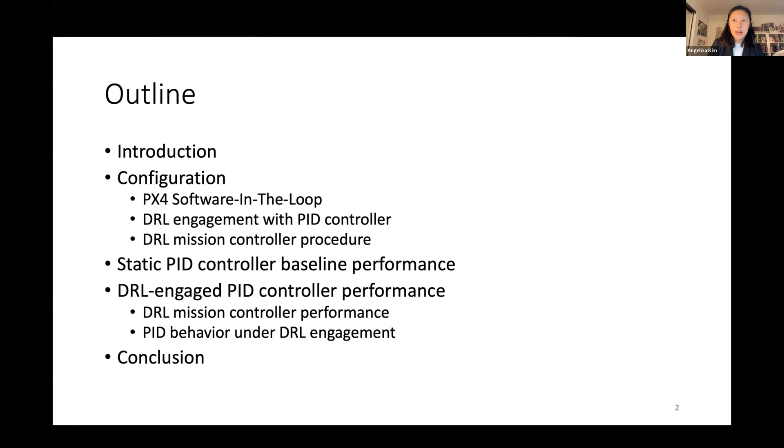Okay, so this is going to be the outline of my presentation today. First, I'll be going through an introduction, then discussing more on the configuration and setup of the project, specifically regarding the PX4 software in the loop and the DRL engagement with PID controller, along with the DRL mission controller procedure. Then I'll be discussing my results with the static PID controller baseline performance and the DRL engaged PID controller performance, specifically regarding the DRL mission controller performance and the PID behavior under DRL engagement, and finally the conclusion and analysis of my results.

So first, a brief introduction. Deep reinforcement learning network has been applied to the control of unmanned aerial vehicles. Previous research has utilized DRL to replace traditional proportional, integral, and derivative controller loops. This study deploys DRL at mission controller to adjust position and velocity PID controllers in flight controller of rotational wing unmanned aerial vehicles to improve mission control performance. It is equivalent to an online tuning of front end and low sampling rate PID controllers in real time to achieve a desired performance.

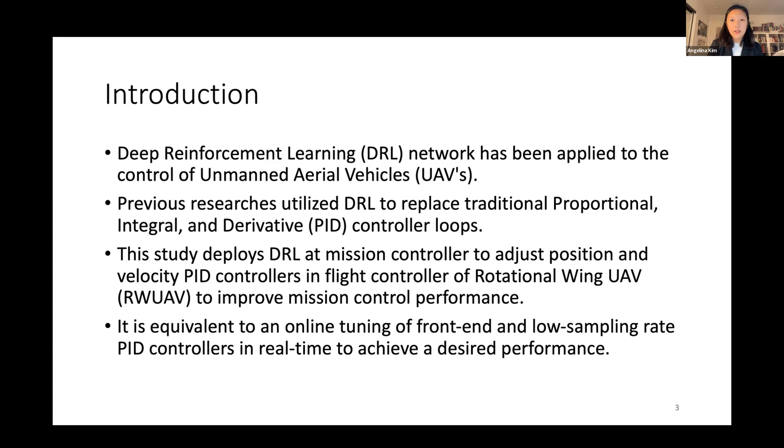So here we can see some commercial jet fleet accident statistics from the Boeing company. The takeoff, initial climb, final approach, and landing phases account for 67% of accidents with 6% exposure time. Though these are limited to fixed wing and manned airplane statistics, the goal of this study is to resolve these issues with a rotational wing unmanned aerial vehicle through dynamic control and performance improvement at these 4 phases.

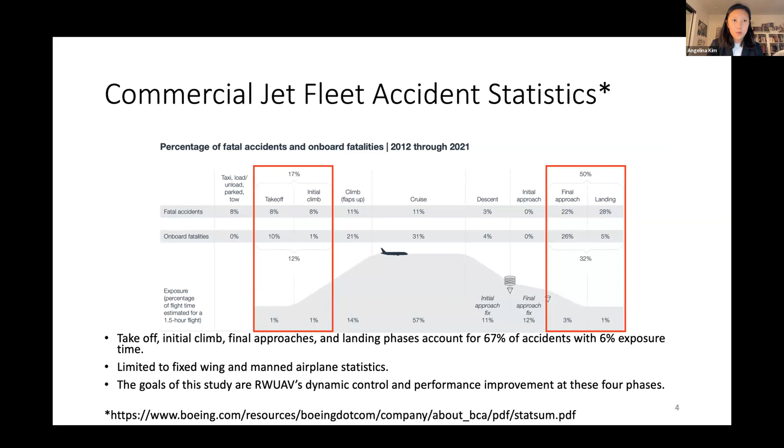So the PX4 software in the loop. The PX4 Autopilot is a RWAV platform and is under the software in the loop. Gazebo Physics Simulator provides environments to PX4 RWAV, and specifically the wind plugin supports the random wind, which is what I used in my study. The mission controller is a custom Python code with or without DRL network, depending on the specific case. And QGroundControl is an optional visualization and monitor tool. All elements are connected through the micro aerial vehicle link, or MAVLink.

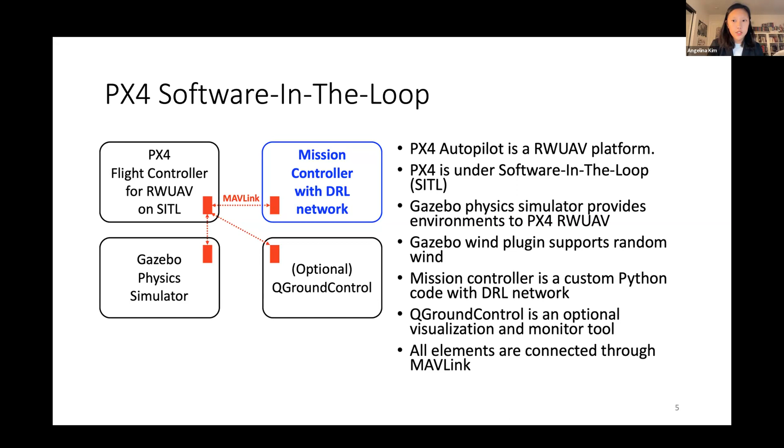The DRL engagement with PID controller. So the TF-Agents reinforcement learning agent implements the DRL network at mission controller. The DRL network accepts telemetry observation data as input, generates action space with position and velocity controller coefficient ranges, and then updates the position and velocity PID controllers through MAVLink at 10 Hz rate. Position and velocity controllers' rate is 50 Hz, and they are tuned in real time by the DRL network.

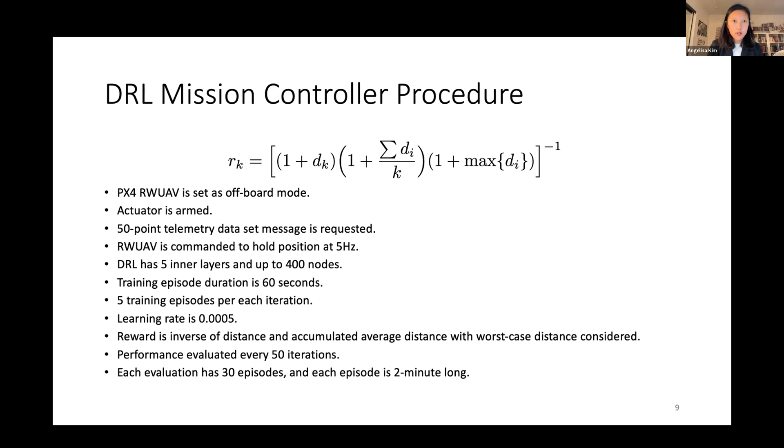So the static PID controller baseline performance. Static PID controller RWAV is put to varying windy environments. Horizontal wind with random velocity and direction is applied to RWAV as force in Gazebo. At each mean velocity, wind is set at 0.5 meters per second standard deviation and limited at greater than 2 meters per second than the mean maximum velocity.

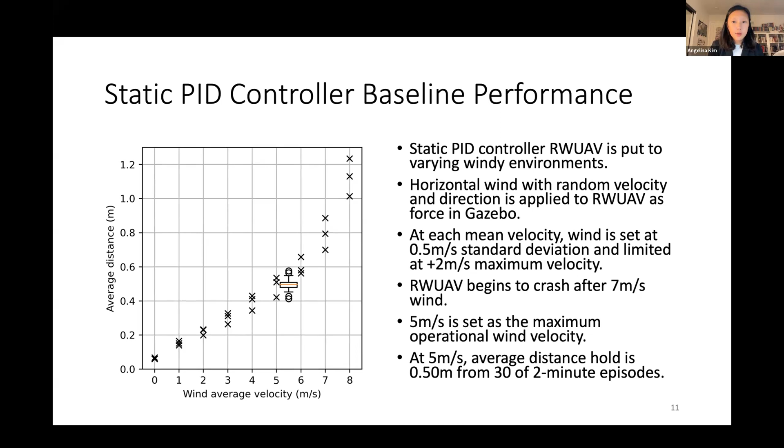RWAV began to crash after 7 meters per second, so 5 meters per second is set as the maximum operational wind velocity. At 5 meters per second, average distance hold is 0.5 meters from 30 of 2-minute episodes.

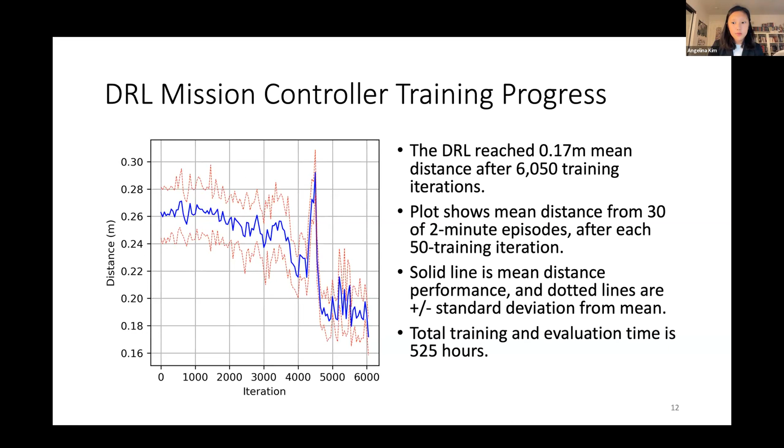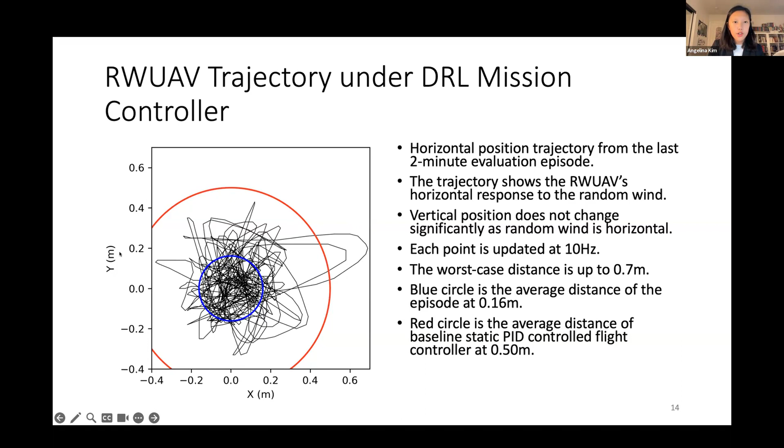and the blue circle is the average distance of the episode at 0.16 meters. The red circle, on the other hand, is the average distance of the baseline static PID flight controller at 0.50 meters.

So when comparing the static PID versus the PID under DRL, even though they receive the same position holding commands, there is a significant difference. The static PID case has a 0.50 meter average distance, whereas the DRL tuned PID performs significantly better at keeping target position. So now I'm going to be doing a demonstration.

Here we go. Please let me know if you can't see the little video screen that I just pulled up.

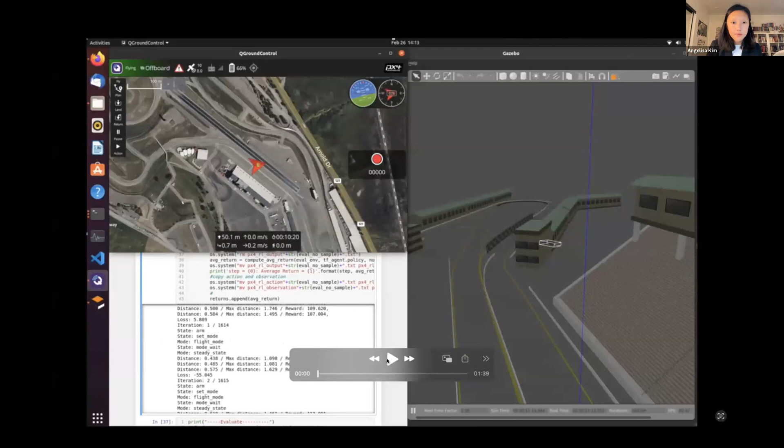So right now, this is just basically a demonstration of the implementation of the program. So right now we're setting up the drone. This is the simulator. And now we're running the mission control. The drone's taking off. And it's trying to stay as close to the blue line, which is the origin, as possible.

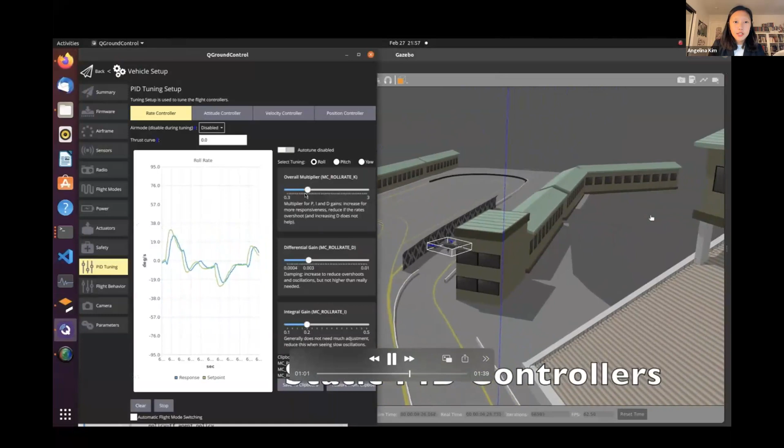Okay, so now this is the static PID controllers. As you can see, the PID values are staying the same, and there's quite a bit of movement as the random wind pushes the drone. So you can see there's some distance increasing from the origin.

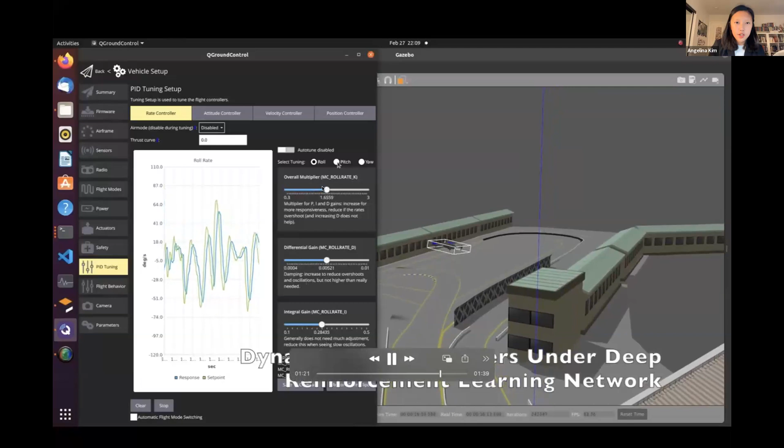However, for the dynamic PID controllers, which are constantly moving, as you can see here, the drone's overall average distance from the origin significantly decreases, and it's able to stabilize around the origin a bit more.

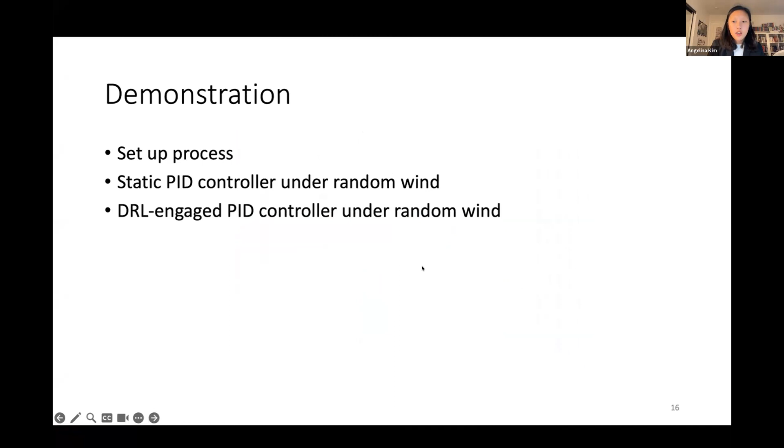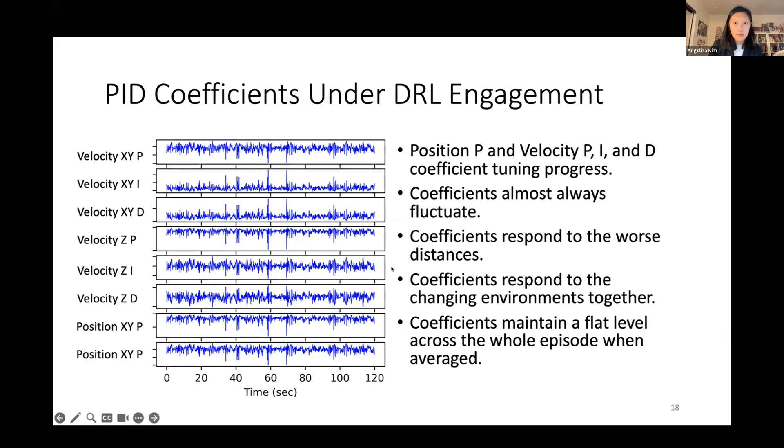So, in conclusion, a DRL network in mission control was engaged with the RWUAV's position and velocity PID controllers in the software in the loop. The DRL network was trained with a 50-point telemetry data set at 10 Hz, and it updated 8 PID controller coefficients at 10 Hz dynamically based on the observation data.

After 6,050 training iterations over 525 hours, the RWUAV's position hold performance was compared with the RWUAV with static PID controllers under a mean 5 meters per second random wind. The DRL-engaged PID controllers with 8 coefficients improved position hold consistency by 65%, at a 0.17 meter average distance, from 0.50 meters for the static PID controller RWUAV position hold.

The DRL network modulated PID coefficients persistently to maximize position hold mission performance by exploring the PID coefficient action space. This concludes my presentation.

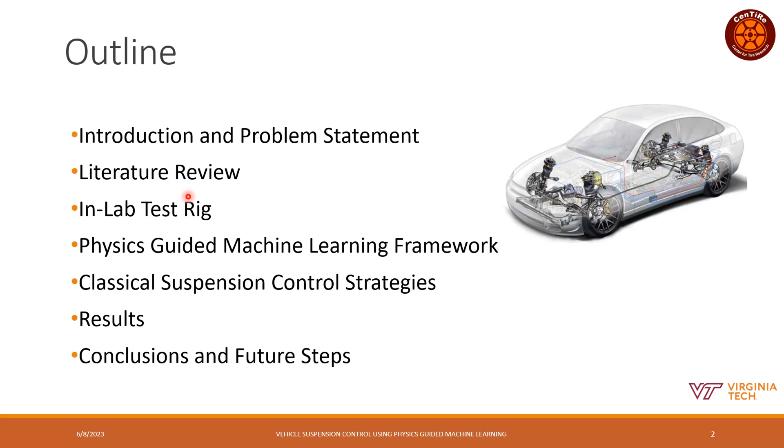Finally, I'll talk about the physics-guided machine learning framework we have proposed and developed as part of this research, how we implemented classical suspension control strategies as our baseline model, and a comparison between this framework and the classical strategies. I'll end with the conclusions and future directions for this research.

Conventional classical suspension control strategies, for example skyhook and groundhook control, along with machine learning based controllable suspension systems, are completely data driven, needing to acquire sprung and unsprung mass data to optimize the damping coefficient. Because they are so data driven, they cannot accurately adapt to different road profiles, tire inflation pressures, and different normal loads acting on the vehicle.

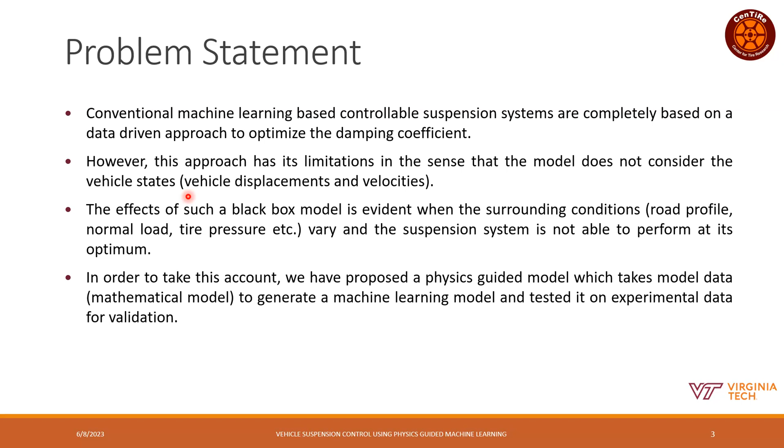Hence, to tackle this, we need a framework which combines the merits of both a data-driven approach and a physics-guided modeling approach. And this is where our framework comes into the picture.

Before diving into the framework, a quick overview of suspension systems. Passive suspension systems are conventional dampers whose damping coefficient cannot be changed, and are the least complex subsystems. At the other extreme, active suspension systems can vary the damping coefficient by changing the fluid damping, or use a linear actuator that changes the external force transmitted from the road surface to the sprung mass. However, they are highly complex and costly.

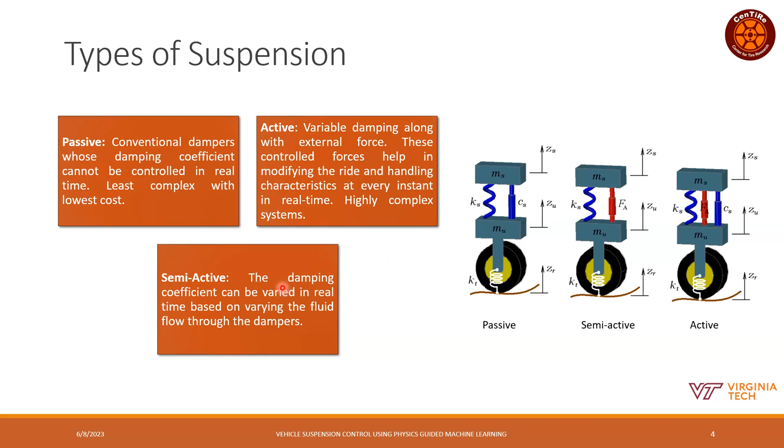This is where semi-active suspension systems come in, wherein the damping coefficient can be varied in real time by varying the properties of the fluid flowing through the damper. Semi-active suspension systems are what we focus on in this research.

What we have in our lab is a shock dyno test rig. We've slightly modified it to collect sprung and unsprung mass data using 3 single-axis accelerometers. We've tested the damper at different input velocities from the base of the rig, different normal loads, and different valve openings, each of which changes the damping coefficient of the damper.

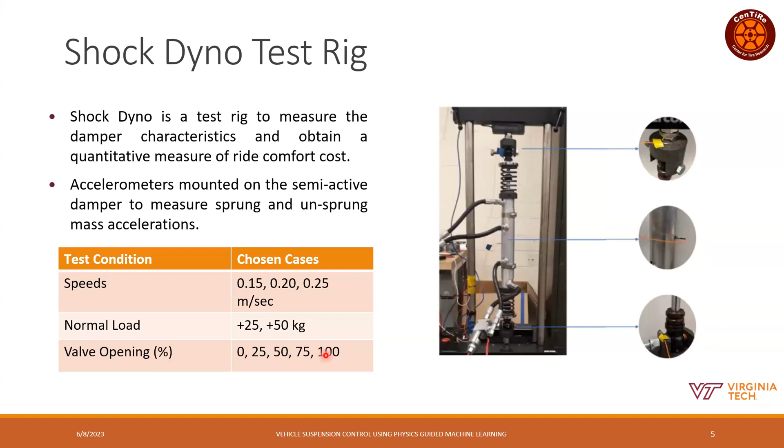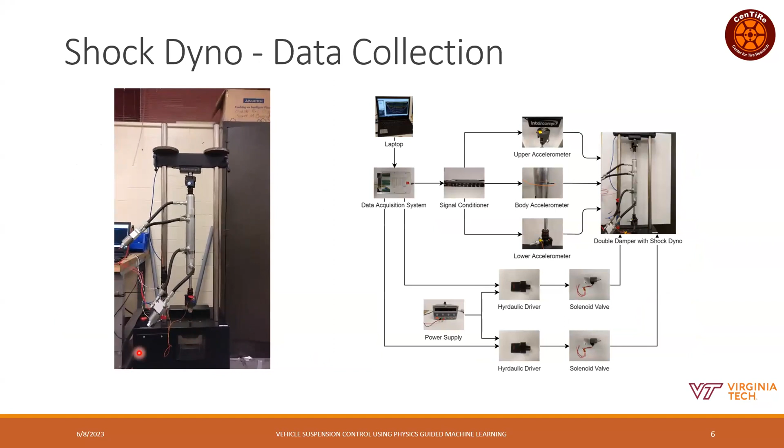This is a short video demonstration of how the shock dyno test rig works, along with the accessories and electronic hardware setup required to change the damping coefficient in real time and collect accelerometer data for the unsprung and sprung mass of this quarter car test rig.

So finally, I'd like to talk about the framework which we are proposing here, which is a physics-guided machine learning framework. The entire framework can be classified into 3 different stages. The first stage comprises a machine learning-based regression module. This is completely black box and it takes inputs in the form of an actual unsprung mass acceleration, which we get from the accelerometer mounted on the shock dyno, the damping coefficients, the normal load vector, as well as the input velocity vector. And the output of this regression model is the actual sprung mass acceleration data.

The second stage of this model is where we try to induce physics into the entire black box machine learning with the development of a single degree of freedom base excitation model. The inputs to this base excitation model are a desired sprung mass acceleration and the actual unsprung mass accelerations. And the output is the desired damping coefficient we need in order to get the desired sprung mass acceleration values. As soon as we get these desired damping coefficients, we input them to the pre-trained regression module and get our model-based sprung mass accelerations.

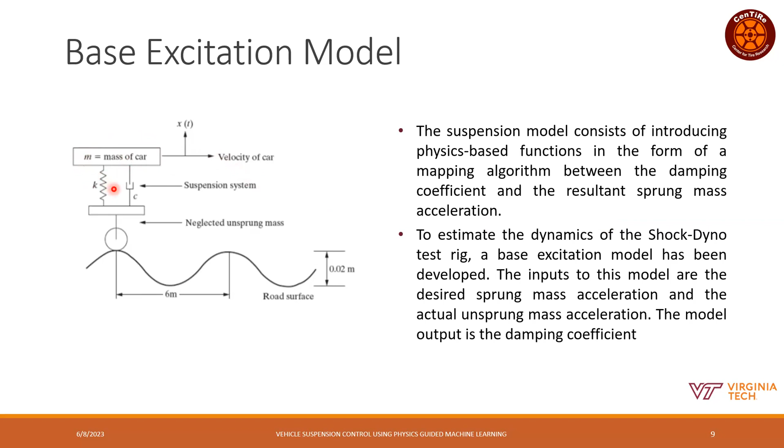So now, I'd like to talk about the kind of physics-based model which we've implemented in this machine learning. This is nothing but a single degree of freedom base excitation model. The base excitation model has been developed such that it matches closest to the shock dyno test rig which we have in the lab on which the data has been collected. It comprises the single degree of freedom, in this case the sprung mass of the vehicle, and the dynamics of the sprung mass have been encapsulated by this spring with a stiffness K and a damper with damping coefficient C, which in real life is represented by the damper mounted on our shock dyno test rig.

So the first stage of our physics-guided machine learning framework was the development of the regression model. The regression model took as inputs different unsprung mass accelerations, velocity vectors, and the normal load, and gave us outputs in the form of sprung mass acceleration. We tried different regression models ranging from support vector machines to neural network regressions. Based upon our quantitative metrics of R-square and RMSE values, we found that the neural network regression gave the highest performance, and hence we decided to choose this to predict the sprung mass accelerations.

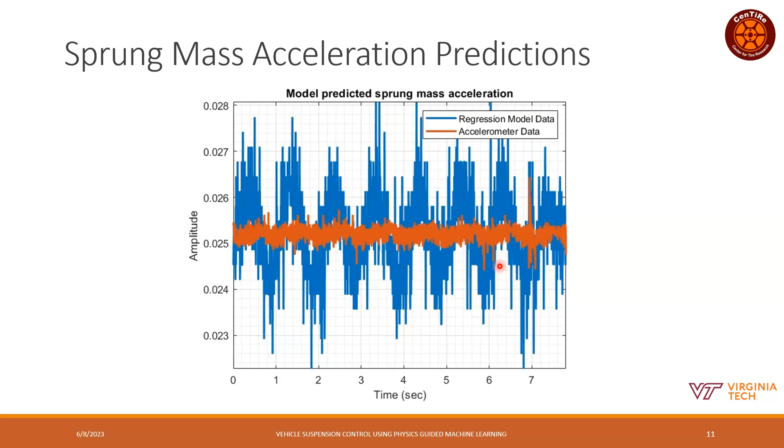This slide shows the comparison between the sprung mass accelerations from the actual experimental setup, shown in red, as compared to the one in blue, which is from the neural network-based regression model. We can see from this graph that the differences are minute, in the range of 10 to the power minus 2.

So now, with the development of this physics-guided framework, the next step was to develop baseline models so that we can compare the performance of this framework with the classical suspension control strategies. For this, we've implemented two classical control strategies, which are skyhook control and ground-hook control. Both of these controls are essentially on-off control, and they depend upon the relative velocity difference between the sprung and the unsprung mass.

To give an intuition to each of these control algorithms, the skyhook control assumes a virtual damper connected to the sky from the sprung mass, and the primary objective of this is to improve the comfort of the passenger inside the vehicle. Analogous to this is the ground-hook control, wherein we have a virtual damper connected from the unsprung mass M2 to the ground. The primary objective of this is to improve the road holding characteristics of the vehicle, that is, to improve the traction force between the vehicle and the road.

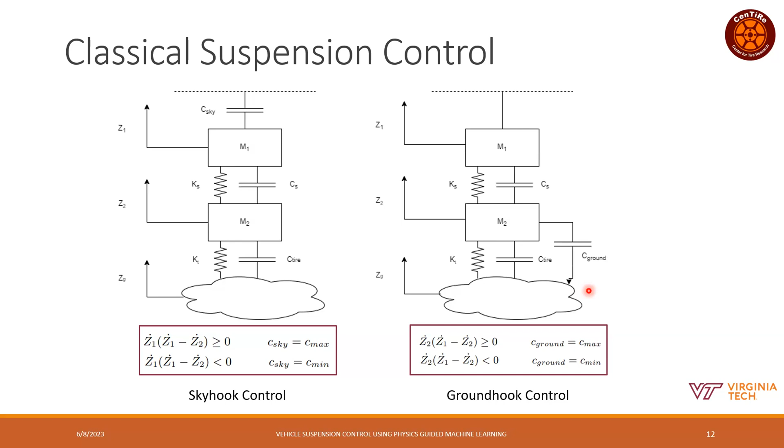Now, talking about the results stage, the entire results section can be broadly classified into three different stages. The first stage was to see how well the physics-guided framework can actually estimate the damping coefficient. And in order to get the estimates, the output from the guided framework was compared with that we get from the experimental setup. And what we found is that this framework was able to predict the damping coefficient with an accuracy of 95.22%.

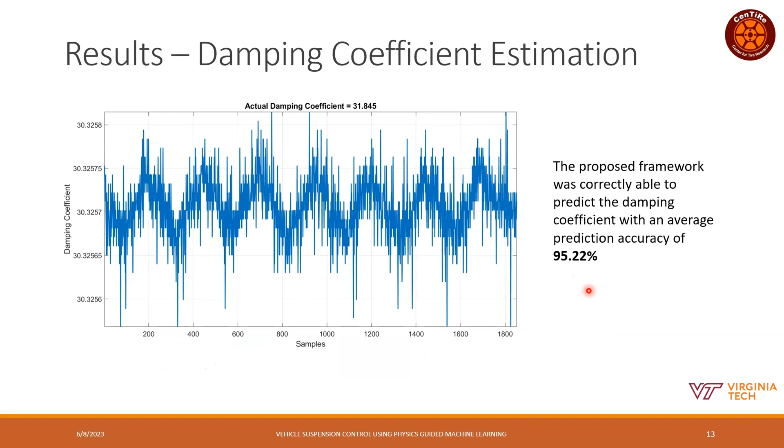The second stage, or the second aspect of the results, is actually evaluating the performance of the physics-guided framework quantitatively and comparing it with the baseline control strategies. And for this, we've utilized the metric of ride comfort. So what ride comfort essentially says is it gives us a quantitative metric of the amount of comfort which is felt by the rider inside the vehicle.

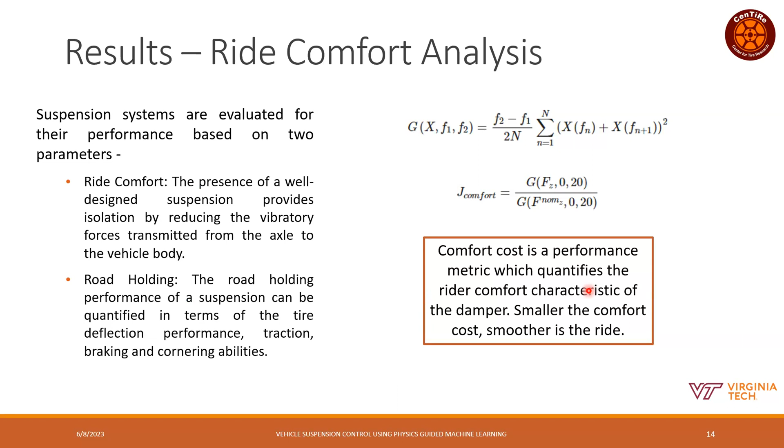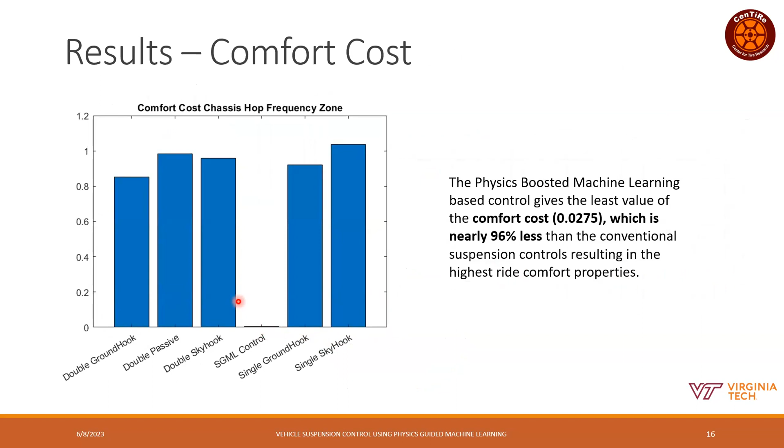This can be better visualized in this histogram, wherein we can see that the comfort cost given by the physics-guided framework is nearly 96% less as compared to the other control strategies, indicating that such a framework gave the highest ride comfort. So to conclude, in this paper, a physics-based approach has been followed in order to tune the damping coefficient of a suspension system by integrating a base excitation model into the black box data-driven approach. Based upon the preliminary results, we found that such a framework could accurately estimate the damping coefficient values, as well as give a better response in terms of reducing the sprung mass acceleration.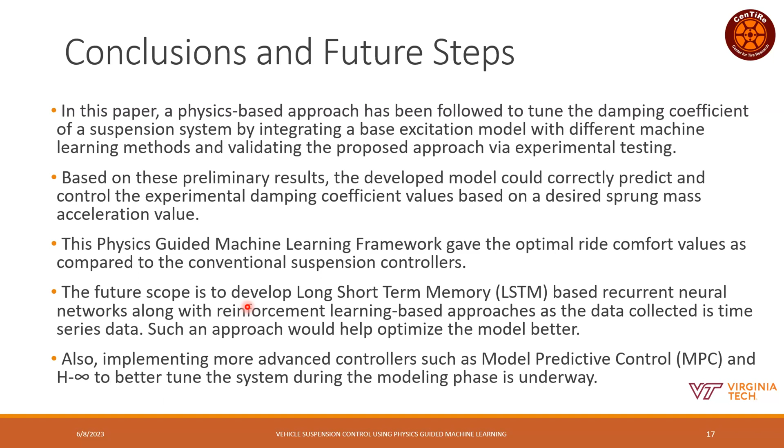The future scope of our research is to further develop long short-term memory-based recurrent neural networks, as the data collected is time series data. Along with this, we also plan to implement more advanced controllers such as model predictive control and H-infinity control instead of the PID controller to see how much of a boost we would get for our performance.

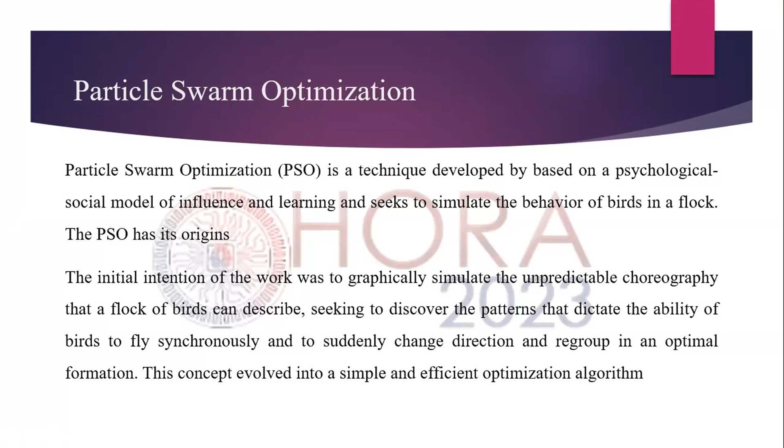Natural language processing is one of the fields of artificial intelligence that studies communication between human and computer. Natural language processing does not aim to transform the language received in the form of sound into digital data and/or vice versa. Rather, it aims to understand the meaning of a given text, written in a natural language format, and provide an appropriate response, for example, by performing a certain action or displaying certain data.

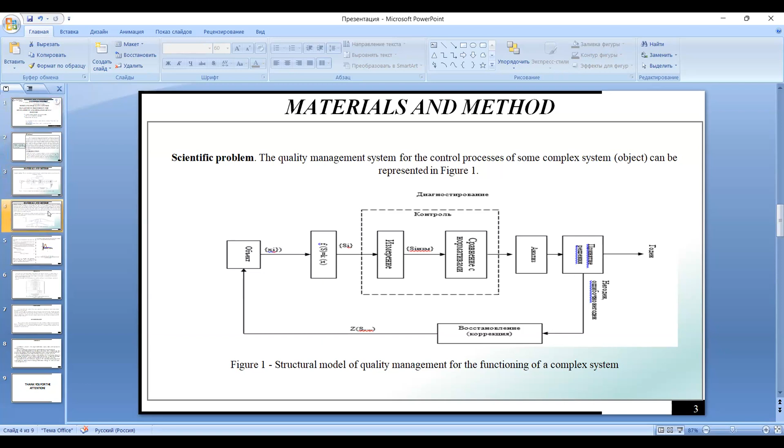In the next slide we show our research methods. It's expected that when collecting information, the occurrence of errors of control or monitoring are directly dependent on the measurement error. Control errors are estimated as the probabilities of false and undetected rejects, and in problems on the theory of failure reliability are designated accordingly, like the probabilities.

As noted above, the results of control risks depend on the systemic composition of all statistical characteristics of control and control agents. The number of all possible combinations of distribution laws in compositions is 739. A number of such combinations have already been studied and published, but the bulk of the tasks on the subject remain unexplored.

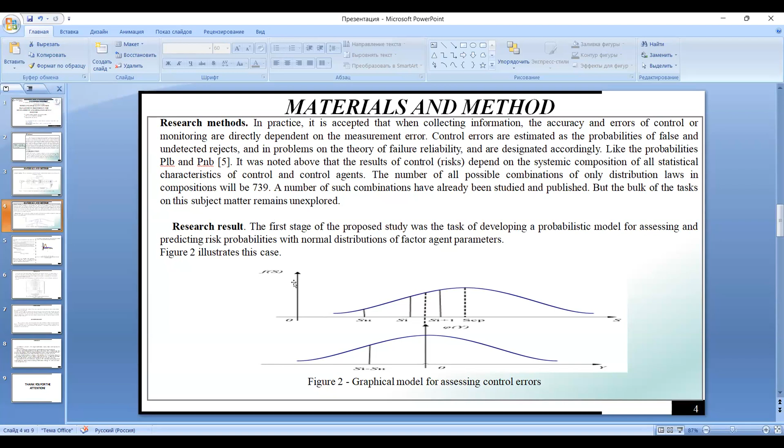And in this figure you can see that instrumental control is the most important stage of diagnosis. The diagnostic system is based on the measurement and control procedure of certain parameters. You see the set Si, which is the set of indicators.

of the functional performance of an object in physical, economic, or social form of natural dimensions. In real situations, it's not always possible to control the selected natural indicators in existing units of measurement, so they resort to replacing them with indirect ones, informationally correlated with them, which are called diagnostic parameters.

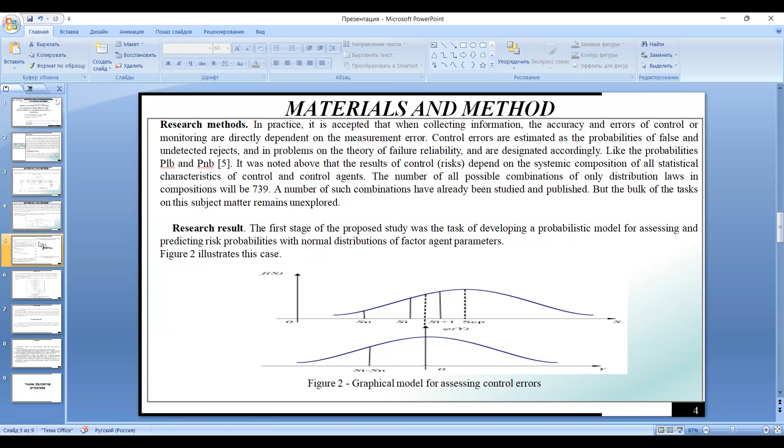The next slide is about quality of system processes. This is evaluated by the result of measuring each implementation from the set of parameters S and comparing the measured value with the normative, where SN is the lower standard and SV is the upper standard. If the measured value goes beyond the accepted standards, this procedure is carried out in the analysis unit.

In this case, we see event A and event B. Event A is the case provided that the value of parameter S is in the interval. Event B is the case when the measured value according to the device is below the limit value of the parameter SN.

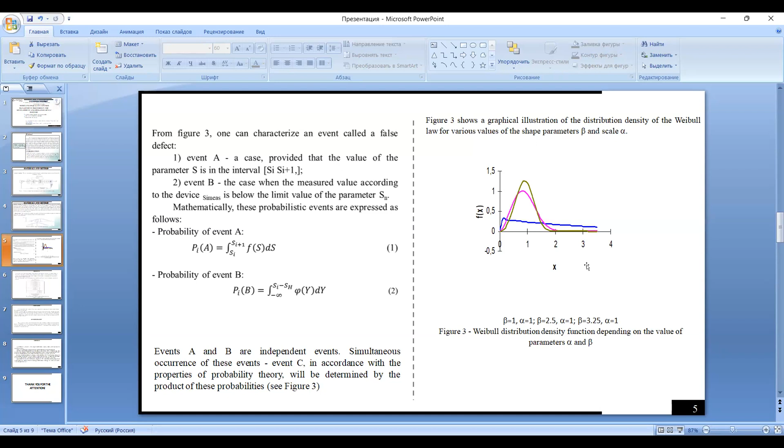Mathematically, these probabilistic events are expressed by these formulas. Events A and B are independent events, and the simultaneous occurrence of these events, event C, is shown in this picture. By the properties of probability theory, this will be determined by the product of these probabilities.

As a result of this research, we can see that during each simulation modeling, they carry out the process of acting out by chaotically changing the values of the current parameters of the standards Sil and Sir. Further simulation of the control process is implemented similarly, where other parameters will be changed in accordance with the previously described example shown in this picture. You can see the step-by-step structure of this algorithm.

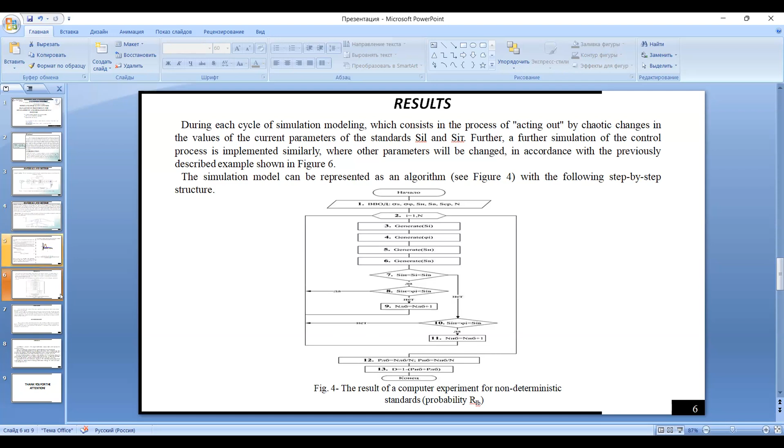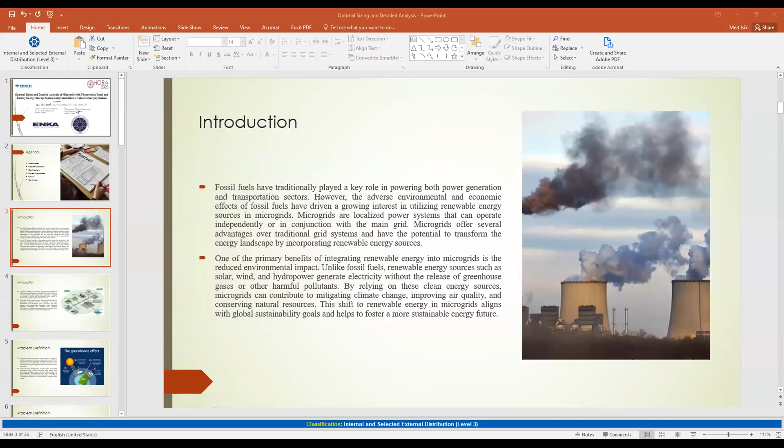Hello, yes, I am. Can you hear me? Yes, we can hear you. All right, okay. Can you see the screen? Yes, we can see. You can start.

All right. Hello, everyone. Thanks for having me. Let me introduce myself first. This is Uğur Mert Işık. I am an electrical engineer working at ENKA Engineering Design Center for more than 4 years. Currently, I am studying for my master's degree at Yıldız Technical University from Turkey. Today, I am going to present a study called Optimal Sizing and Detailed Analysis of Microgrid with Photovoltaic Panel and Battery Energy Storage System Integrated Electrical Vehicle Charging Station.

Agenda. The presentation consists of 6 sections. We will start with an introduction first, then we examine the problem definition, contributions, system description, results, and at last we will close it with the conclusion.

Fossil fuels have traditionally played a key role in powering both power generation and transportation sectors. However, the adverse environmental and economical effects of fossil fuels have driven a growing interest in utilizing renewable energy sources in microgrids. Microgrids are localized power systems that can operate independently or in conjunction with the main grid. Microgrids offer several advantages over traditional grid systems and have the potential to transform the energy landscape by incorporating renewable energy sources. One of the primary benefits of integrating renewable energy into microgrids is the reduced environmental impact. Unlike fossil fuels, renewable energy sources such as solar, wind, and hydropower generate electricity without the release of greenhouse gases or other harmful pollutants. By relying on these clean energy sources, microgrids can contribute to mitigating climate change, improving air quality, and conserving natural resources. This shift to renewable energy in microgrids aligns with global sustainability goals and helps to foster a more sustainable energy future.

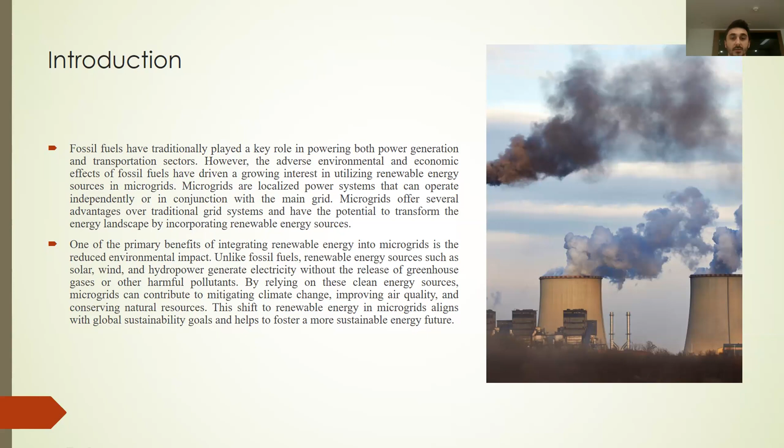Another advantage of renewable energy-based microgrids is their increased resilience and reliability. By utilizing a diverse mix of renewables and energy storage technologies, microgrids can provide a reliable and uninterrupted power supply to communities, critical facilities, and remote areas.

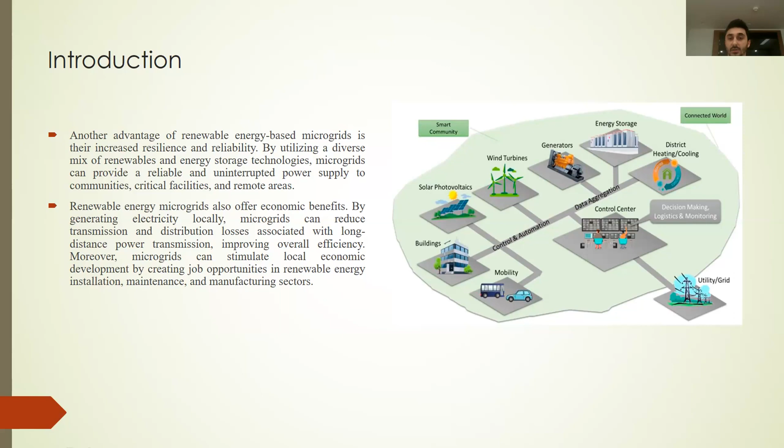Renewable energy microgrids also offer economic benefits. By generating electricity locally, microgrids can reduce transmission and distribution losses associated with long-distance power transmission, improving overall efficiency. Moreover, microgrids can stimulate local economic development by creating job opportunities in new renewable energy installations, maintenance, and manufacturing sectors.

Problem definition. Fossil fuels have long been the primary source of energy for both transportation and power generation sectors, but their extensive use poses significant challenges and issues. These issues encompass environmental, economic, and social concerns, contributing to the global push for cleaner and more sustainable alternatives.

One of the most pressing issues related to fossil fuels is their detrimental impact on the environment. When burned, fossil fuels release greenhouse gases, particularly carbon dioxide, into the atmosphere. These emissions are a major contributor to global climate change. The continued reliance on fossil fuels exacerbates this problem and hinders efforts to mitigate climate change.

The economic implications of fossil fuel dependency are also significant. Fossil fuel prices are subject to fluctuation due to various factors such as geopolitical tensions, supply disruptions, and changing market dynamics. This volatility can have adverse effects on energy prices and energy security, impacting both individuals and economies. Moreover, as fossil fuel reserves become depleted, the cost of extraction and production increases, leading to high energy costs.

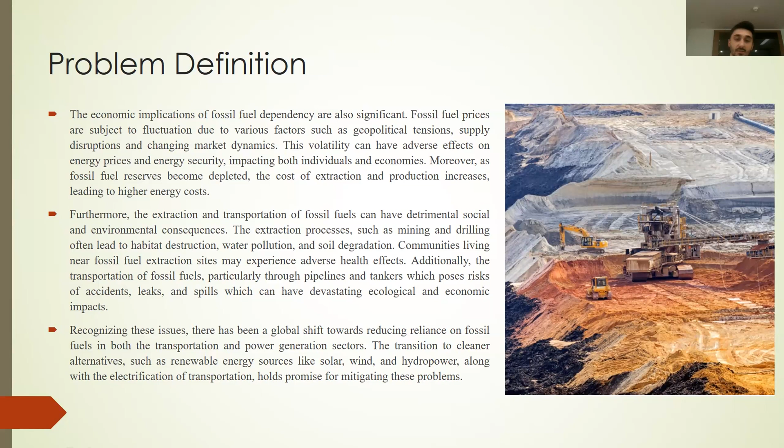Recognizing these issues, there has been a global shift towards reducing reliance on fossil fuels in both the transportation and power generating sectors. The transition to clean alternatives, such as renewable energy sources like solar, wind, and hydropower, along with the electrification of transportation, holds promise for mitigating these problems.

Contributions. Objectives in this work can be expressed as below. Optimal sizing of electrical vehicle charging stations, optimal sizing of the PV panels while considering both physical and financial limits, assessing the ability of the battery storage system to function as an uninterrupted power supply during a power failure, cost of energy and net present cost minimization, and minimizing carbon emissions.

The above listed objectives are executed using HOMER, which is a power simulation tool that is used to design and plan renewable energy-based systems. It allows the user to input various parameters such as market availability and personal preferences to optimize the system design. System description.

The objective of this work is to design a sustainable and profitable ecosystem considering renewable energy sources that ensures load demand mitigation while minimizing the cost and carbon emissions. The site ecosystem is located in Avon Park, Florida, and consists of 20 buildings with 10 apartments each. There is an electrical vehicle for each apartment, 200 electrical vehicles in total. There are 20 rooftop PV panel mounted parking stations in total, one for each building.

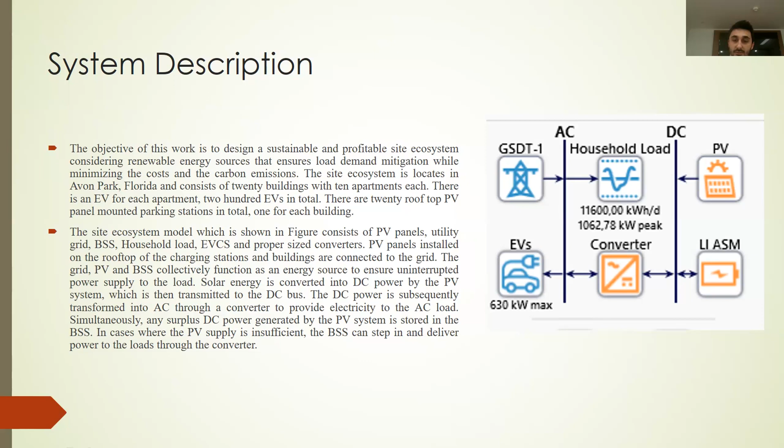Mr. Işık, you have 2 minutes left. Please try to summarize and conclude your work. Well, it seems like it will take like 5 minutes more. Okay, please go on. Okay.

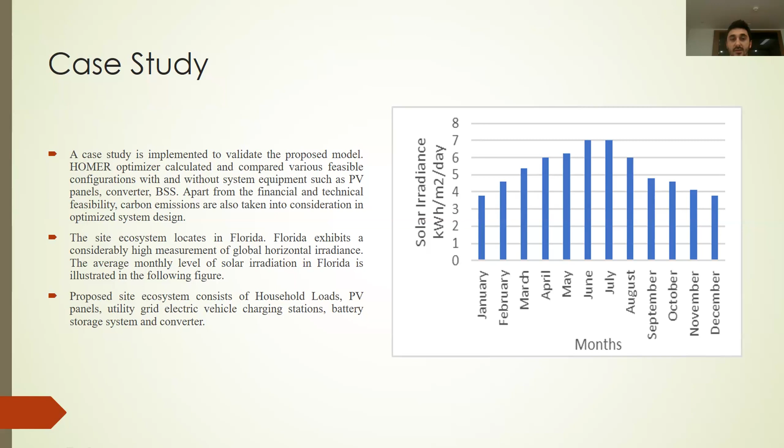A case study is implemented to validate the proposed model. The HOMER optimizer calculates and compares various feasible configurations with and without system equipment such as PV panels, converter, and BSS. The proposed system consists of household loads, PV panels, utility grid, electrical vehicle charging station, battery storage system, and converter.

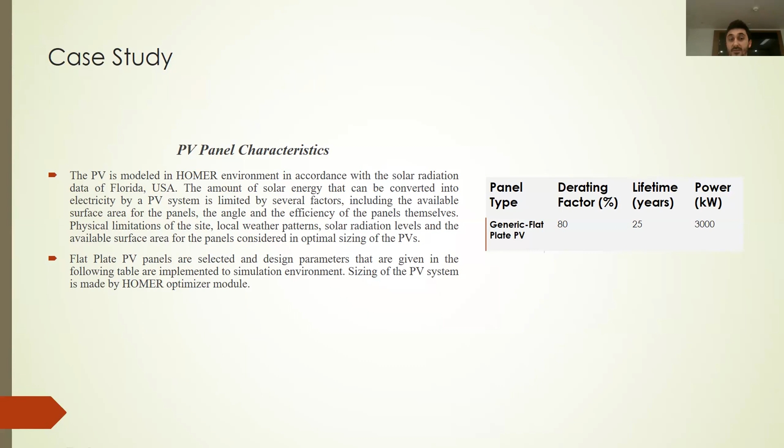PV panel characteristics. The PV is modeled in the HOMER environment in accordance with the solar radiation data of Florida, USA. The amount of solar energy that can be converted into electricity by a PV system is limited by several factors, including the available surface area for the panels, the angle, and the efficiency of the panels themselves. Flat plate PV panels are selected, and the design parameters given in the following table are implemented in the simulation environment. Sizing of the PV system is made by the HOMER optimizer module.

EVCS characteristics. The investigation into the power consumption characteristics of the EVCS aims to attain a reliable and optimized microgrid. The modeling of EVs simulates their role as consumers within a parking lot context.

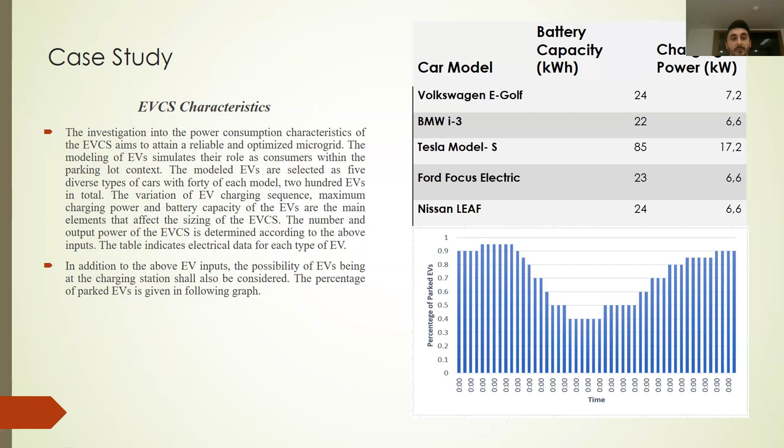The model EVs are selected as 5 diverse type of cars with 40 of each model, 200 electrical vehicles in total. In addition to above EV inputs, the possibility of EVs being at the charging station shall also be considered. The percentage of parked EVs is given in the following figure.

Battery storage system characteristics. The primary objective of the proposed system is to ensure a continuous supply of the required power to load. In situation where the power generation by the PV system is inadequate and to meet the load requirements, the storage system begins the discharging to supply power. If the BSS is depleted, the grid supply is utilized as a main power source.

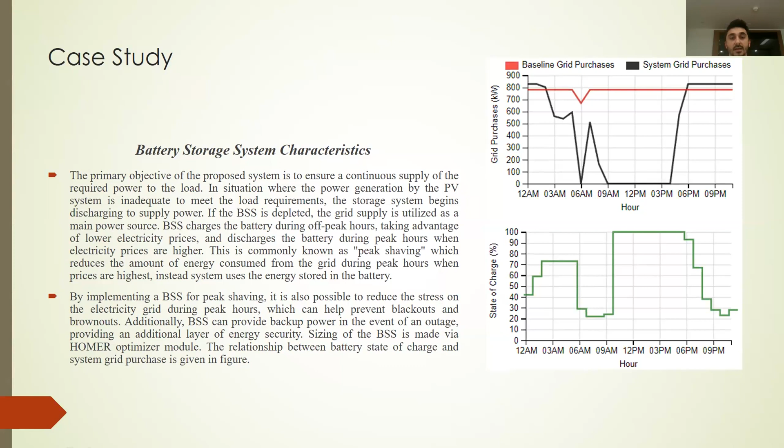BSS charges the batteries during off-peak hours, taking advantage of lower electricity prices, and discharges the battery during peak hours when the electricity prices are higher. This is commonly known as peak shaving. By implementing a BSS for peak shaving, it is also possible to reduce stress on the electricity grid during peak hours, which can help prevent blackouts and brownouts.

Converter characteristics. Converter is the essential part of the proposed system since it provides the transmission between DC power that's supplied by PV panels and BSS. The optimum sizing of the converter is made by HOMER optimizer module with considering both financial and electrical conditions.

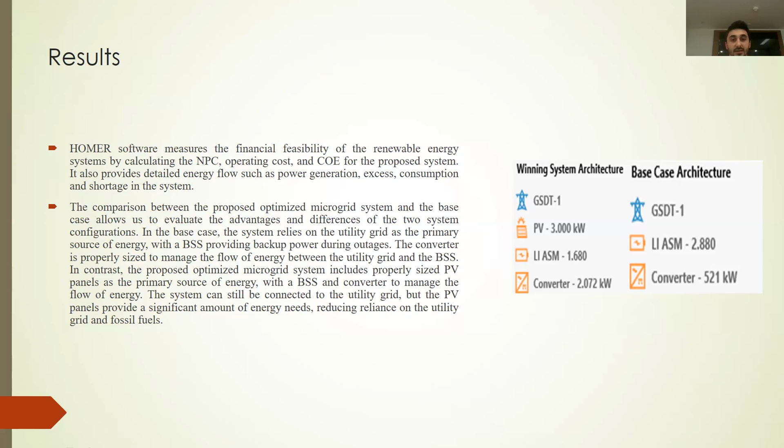Results. Homer software measures the financial feasibility of the renewable energy systems by calculating net present cost, operating cost, and cost of energy for the proposed system. It also provides detailed energy flow such as power generation, excess, and consumption and shortage in the system. The comparison between the proposed optimized microgrid system and the base case allows us to evaluate the advantages and differences of the two system configurations.

Including battery storage in the base case is primarily motivated by the existence of an annual 2-hour power outage. During the power outage, household load is being supplied by battery storage. It ensures that the system can work as an off-grid in the event of 2 hours power outage. As displayed in the figure, during the power outage, the amount of energy purchased from the utility grid hits zero and BSS is used to supply the necessary household loads.

Thus, the state of charge for the BSS is decreased from 60% to 20%, which is minimum threshold level for the BSS. Once the power outage is over, the battery is recharged to restore its state of charge. The proposed microgrid that consists of grid-connected PV, EVCS, and BSS can be analyzed under several sensitivity parameters.

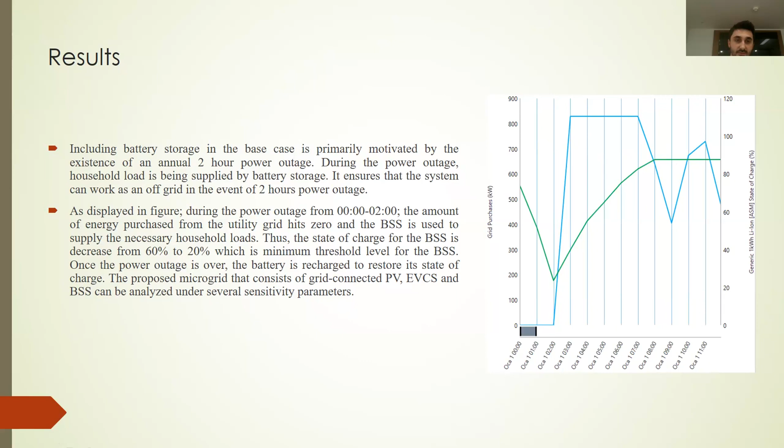Electrical analysis. The main electrical advantages of the optimized system are increased reliability and demand side flexibility. The use of RES and BSS improves the overall reliability of the system. In the event of power outage or disruption in the utility grid, the microgrid can continue to provide power to critical loads. On the other hand, the optimized system's energy purchase decreases significantly, especially before the evening thanks to PV panels.

The optimized system takes advantage of the power generated by the PV panels during daylight hours, which reduces the need for the energy purchases from the grid. Furthermore, as demonstrated in the figure, the BSS is fully charged between 9 a.m. to 6 p.m., which provides additional reliability and flexibility to the microgrid. By storing excess energy generated by the PV panels during the day, the battery can be used to meet energy demand during periods of low or no sunlight.

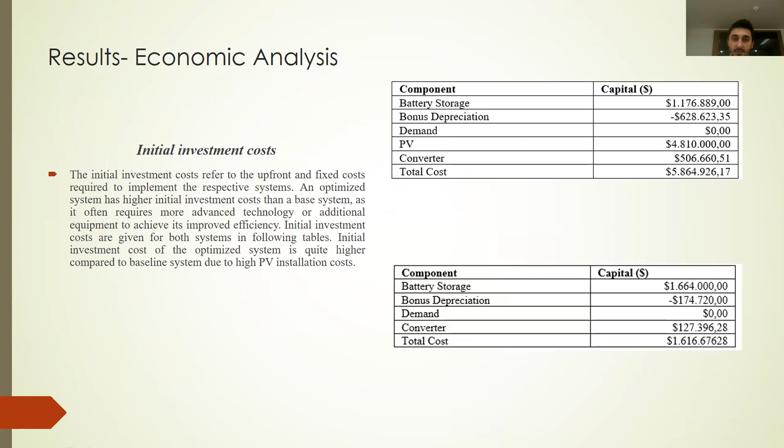Initial investment cost. The initial investment costs refer to upfront and fixed costs required to implement the respective system. An optimized system has higher initial investment costs than a base system, as it often requires the more advanced technology or additional equipment to achieve its improved efficiency.

Operation and maintenance costs. The optimized system will have lower operating costs than a base case system, as it is designed to be more efficient and therefore requires less energy and resources to operate. Maintenance costs may include repair costs, replacement costs, and any other costs associated with keeping the system in good working order. Return of investment. Finally, the ROI.

Mr. Işık, please try to conclude because we have already exceeded your time and there are other papers to be presented. Please try to summarize.

The ROI is a measure of the profitability of the respective system. An optimized system will have a higher ROI than a base system, as it is designed to be more efficient and cost-effective, resulting in higher profitability over time.

Environmental analysis. The Paris Agreement, which was adopted in 2015, is a global agreement aimed at reducing greenhouse gas emissions and limiting global warming to well below 2 degrees Celsius, with a target of 1.5 degrees Celsius. In addition to reducing carbon dioxide emissions, the PV-based EVCS can also help reduce sulfur dioxide and nitrogen oxide emissions, which are major contributors to air pollution.

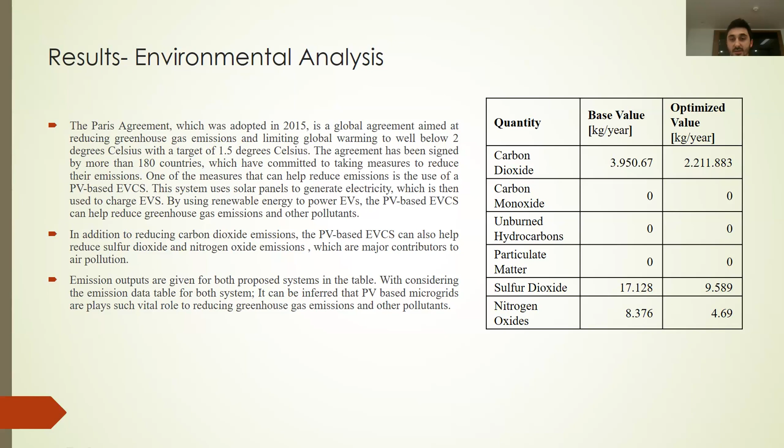Emissions outputs are given for both proposed systems in the table. Considering the emission data table for both systems, it can be inferred that PV-based microgrids play a vital role in reducing greenhouse gas emissions and other pollutants.

Conclusion. The study introduced a model that effectively integrates PV-based EVCS and EVs to accomplish the dual goal of lowering carbon emissions in both the power generation and transportation domains. The study also suggests the use of BSS to smooth out the variability of RES and provide backup power supply during grid outages. The research was simulated using HOMER to check its technical and economic viability.

The results of the simulation showed that the proposed system can significantly reduce carbon emissions by 44%. The study also found that the optimized system can reduce the overall system cost by 9.5%, which makes the proposed system economically viable. Thank you for your patience.

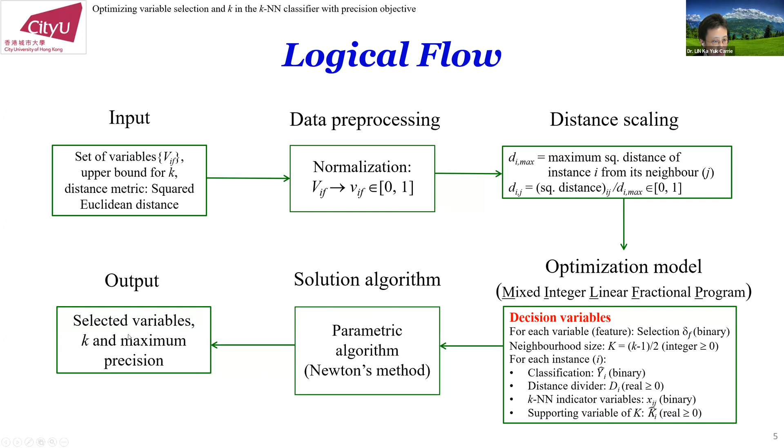Sorry, you have just 1 minute to complete your presentation. Please try to conclude. Okay.

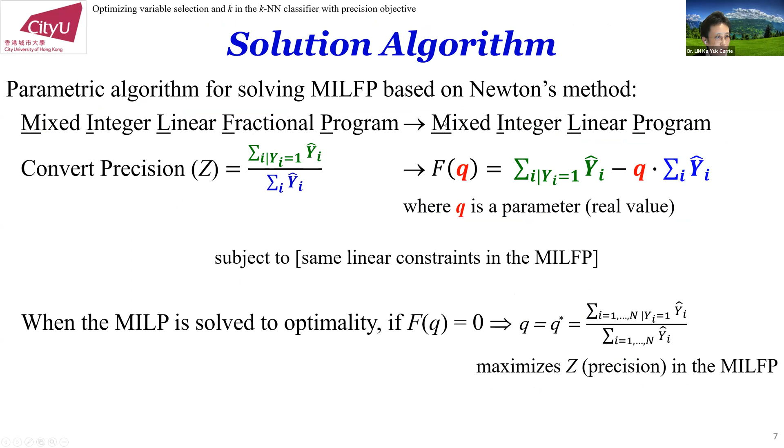So I will skip the solution algorithm, which is quite well known, based on Newton's method. It is simply an iterative approach to solve the mixed integer linear program until the objective value is 0. I will skip the mathematical details and go into the computational experiment. I apply the model on 12 publicly available data sets. What is found is that when there is no requirement on the number of variables to be selected, the precision is good in the full set as well as the training set, but not so good in the test set. So I run the model 3 times, each time with a different lower limit on the number of selected variables.

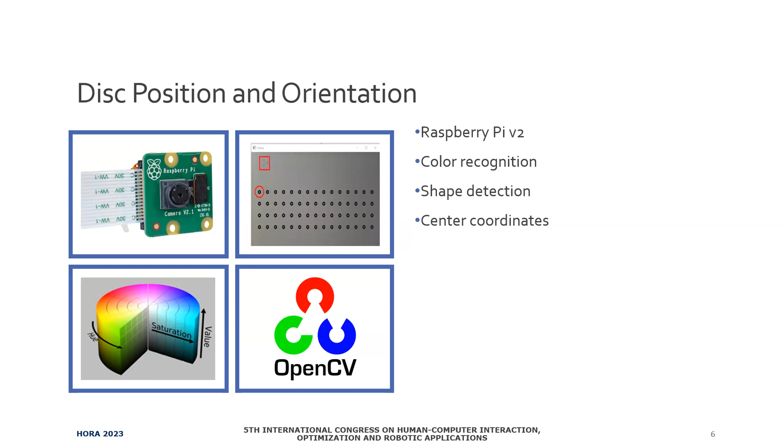The expert system rule base contains information about the evaluation of the person's condition according to the measurement obtained in the dexterity test. At the end of the test, the dexterity score is obtained by evaluating the measurements, including movement classification, determination, and times related to position, velocity, and orientation according to this rule base.

The system outputs various additional parameters in addition to the total test duration, which is used as an evaluation parameter in existing test methods.

Free thinking time is the time elapsed when there is no disc in the subject's hand and the arm is stationary. Thinking time with disc is the time when the subject has a disc in the hand and the arm is stationary.

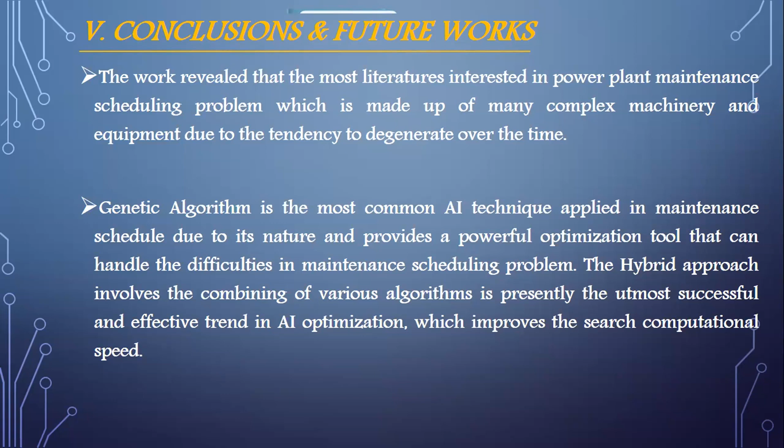The hybrid approach, which involves the combination of various algorithms, is presently the most successful and effective trend in AI optimization, which improves the search computational speed.

The limitation of this work is that the search is restricted to 3 databases. So we suggest expanding the search to include other databases for future work. Also, with the higher increase in data and information technology, combining the Internet of Things and AI techniques to improve maintenance scheduling optimization can be covered in future work.

Thank you for your attention.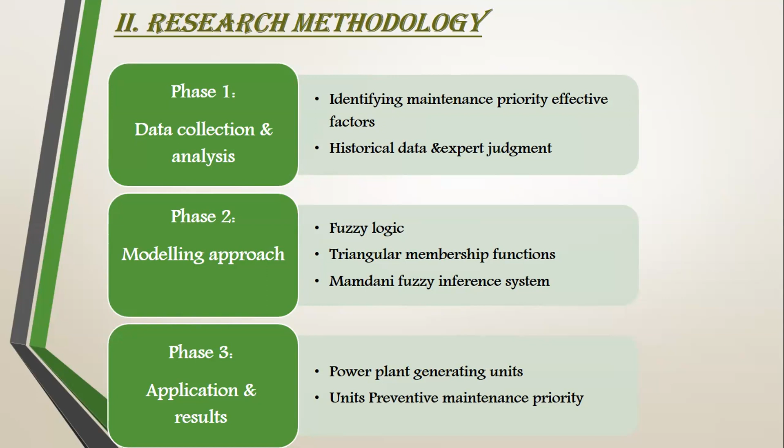The framework of the research methodology includes Phase 1: data collection and analysis, identifying maintenance priority effective factors, and using historical data and expert judgment. Phase 2: modeling approach, using fuzzy logic, triangular membership function, and Mamdani fuzzy inference system. Phase 3: application and results.

The proposed fuzzy model has crisp inputs corresponding to the maintenance priority effective factors considered in this model. The first input is failure severity. 3 types of failure severity are specified based on the possible influence of a particular failure on system performance, as follows.

The first type of failure severity is high severity, with a crisp range of 55 to 100, which results in forced stop of the units, potentially causing damage to the unit's components and also reducing generating unit life.

The second type is medium severity, with a range of 20 to 60, when its occurrence does not result in forced stop of units and can be fixed through normal shutdown. The third type is low severity, when its occurrence does not lead to stopping the generating unit, which can be fixed while the unit is still working.

Safety, this is the second input factor for the fuzzy model. A potential failure of an equipment can result in injury or even death of the workers. This factor is considered very important to conduct the risk.

Three harm severity levels are considered. First level, extreme harm at the rate 60 to 100. The second level, moderate harm with the range 30 to 70. And the third level, slight harm with the range 0 to 40.

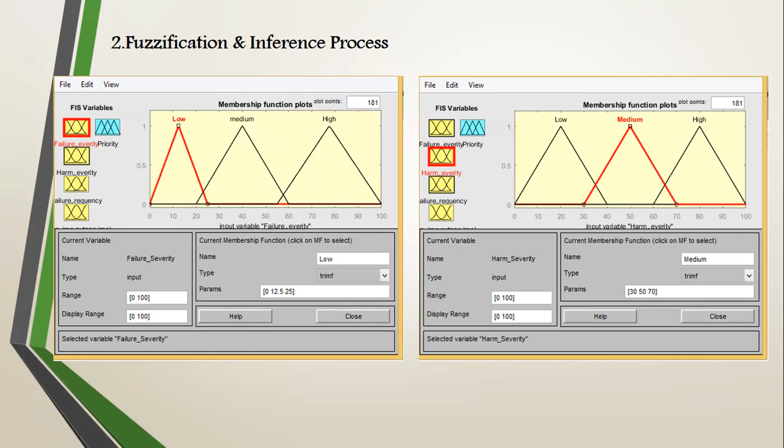The inference process converted the fuzzy input value to fuzzy output value by applying a set of rules. A simple logic combined with expert opinion is used to construct the rules, and a total of 81 rules are formed with the four fuzzy variables and the output variable, which is maintenance priority.

Following the fuzzification and inference process, the overall results must be defuzzified to obtain the final crisp output. Triangular membership functions with three levels, high, medium, and low, are also considered for the output variables, while the center of gravity method is used for defuzzification.

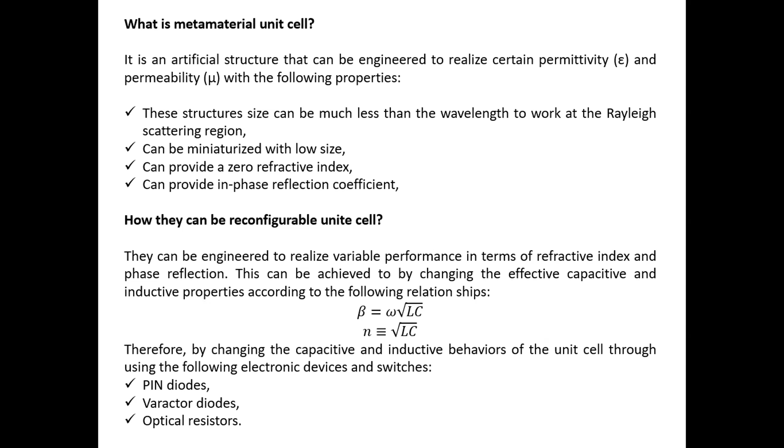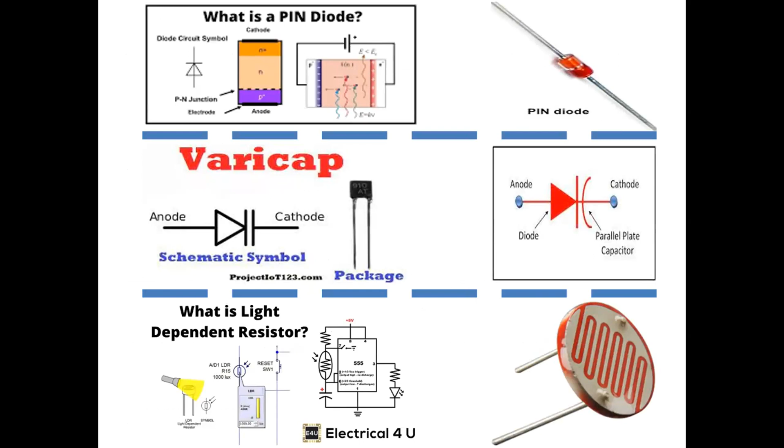So the material can be engineered to provide certain permittivity, permeability, and design frequency bandwidth, and can be miniaturized to a small size and provide zero refractive index. This can be controlled by controlling the L and C parameters of the unit cell with certain switches, including PIN diode, varactor diode, and optical resistor. Here are some examples of switches, including PIN diode, varactor diode, and other types of switches.

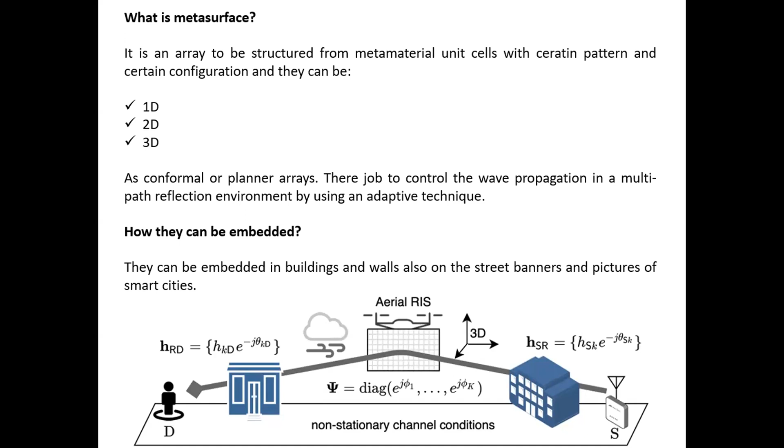The meta surface basically works as a reflector that controls the reflection from the source toward a certain direction, for example, the user. So there is an obstacle between the transmitter and the receiver. This can be controlled by RIS. Despite the obstacle, the direction of the signal can be controlled from the transmitter to the receiver. The ability to control the reflection can be obtained using certain algorithms, including CNN or NN or any other kind of game theory algorithm.

For your information, the meta surface or RIS structure can be embedded in buildings with no significant effect, like this, or can be embedded in walls of buildings. Here in our study, we proposed a bowtie fractal antenna design controlled by a switch located at the middle of the bowtie, and we studied the surface field distribution. We found it smooth, without variation, and symmetric between the edges of the structure.

Now let's look at the channel capacity from the Shannon theorem equation, which says the bandwidth of a unit cell multiplied by N number of channels times log(1 + SNR). From this equation, we have a very obvious answer: increasing the bandwidth can increase the channel capacity. Also, the number of elements can increase the channel capacity.

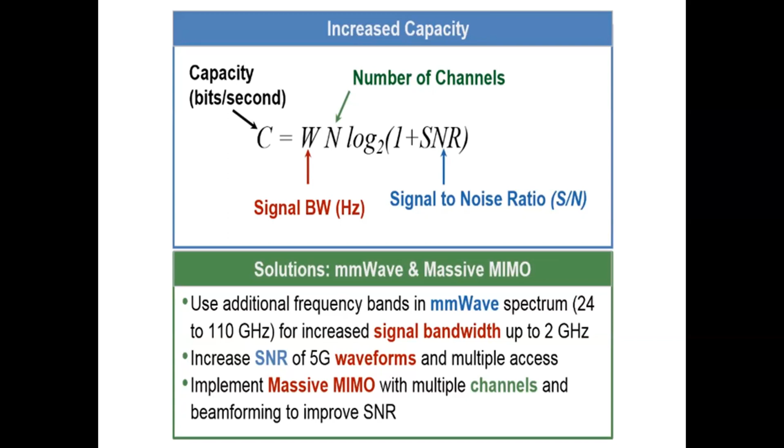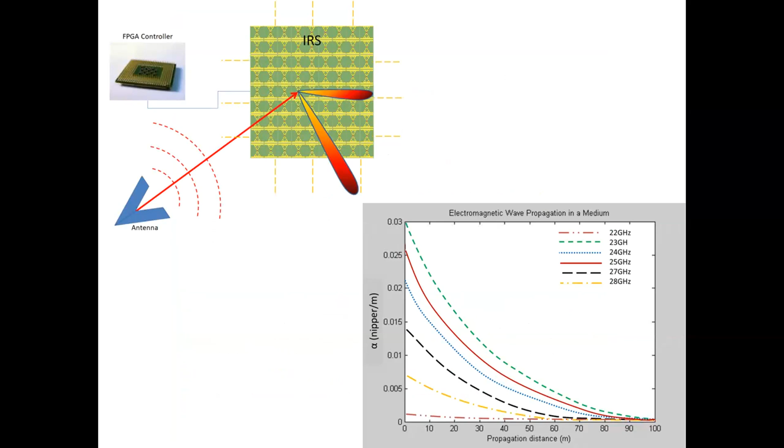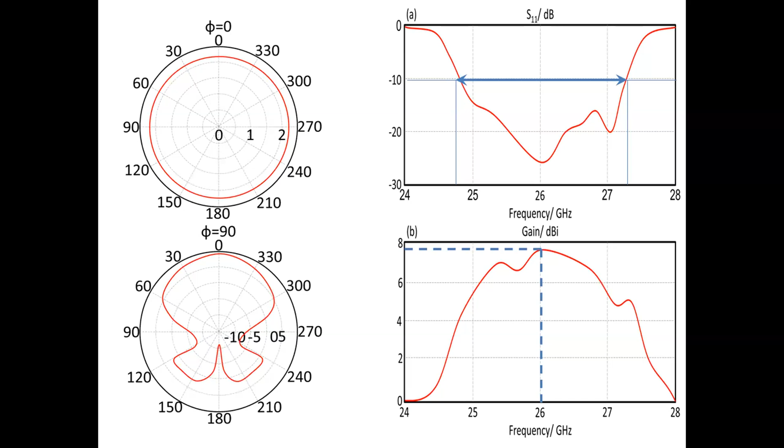Now we use millimeter wave for the technology. However, there is the issue of millimeter wave propagation. Before we went ahead with this design, we found propagation for frequency bands up to 28 GHz goes within 50 meters with an acceptable attenuation factor. Now we study the individual unit cell development. From the S11 parameter study, we found frequency bands from 24.7 gigahertz up to 27.3 gigahertz, about 2.5 gigahertz, with a good gain at 26 gigahertz of 7.8. The radiation of the individual unit cell is almost omnidirectional in the zero plane and very directive in the 90 plane.

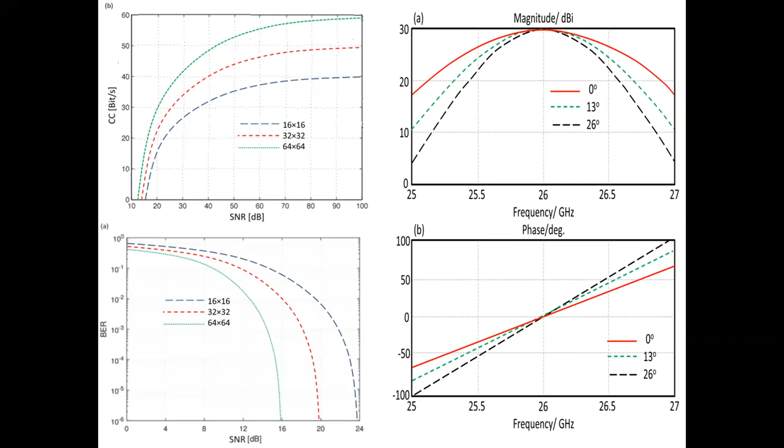I guess the connection is lost. Okay, dear participants, we have 2 more papers. Before that, Afnan, are you here? Hello, I am here. Yes. Did you finish your presentation? Yes. Okay. Thank you very much for your presentation.